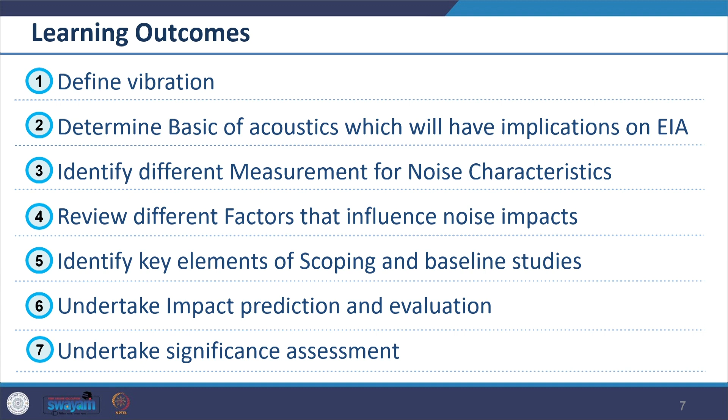So the basic course book we are following is Therivel and Wood's book on methods, so we are constantly referring to that. So when we consider noise, we see that almost all projects have noise impact. And noise during construction may be due to activities such as land clearance, construction, piling work, and the frequent transportation that takes place in and around the site. So all that leads to noise.

And we have seen much of the noise-related legislation. We have also seen certain environmental conditions related to that. So today we'll just focus on some of the limited definitions and then how we undertake scoping, baseline, and impact prediction and assessment. So noise is a major and growing form of pollution, and we had already seen WHO guidelines on that.

Looking at the basic principle of vibration, so what is vibration? Vibration refers to the oscillation of an object about a reference point. The number of oscillations per second is given in the form of frequency of vibration. There is a difference in how vibration and sound are experienced or sensed by humans. Sound is detected by hearing, whereas vibration is felt as it is transmitted through the solid structure directly to the human body. So one we receive from the ear, and the other we feel with the entire body.

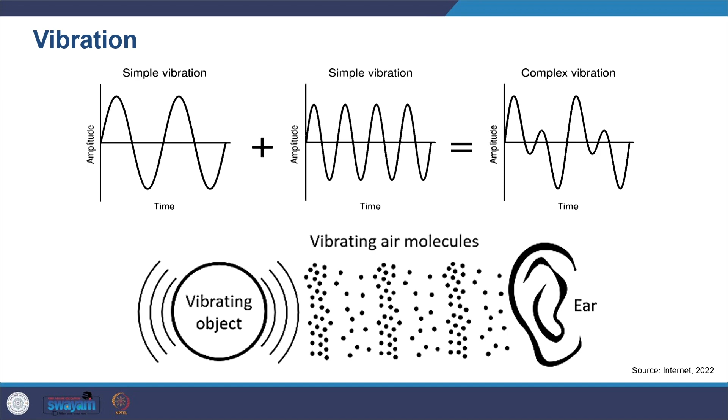So vibration can occasionally occur at a single frequency, but usually it is seen at several different frequencies. Vibration frequencies between 1 to 80 hertz are perceptible to humans. The particle may vibrate vertically, longitudinally, and horizontally as well. Often it is a combination of all these three: vertical, horizontal, and longitudinal.

Generally, what we see in EIA is that this vibration is quantified and given in terms of peak particle velocity, PPV, measured in millimeters per second, mm/s. So that is how you refer to it in an EIA report. And if you look at the threshold of human perception of vibration, the range is from 0.14 mm/s to 0.3 mm/s peak particle velocity, PPV.

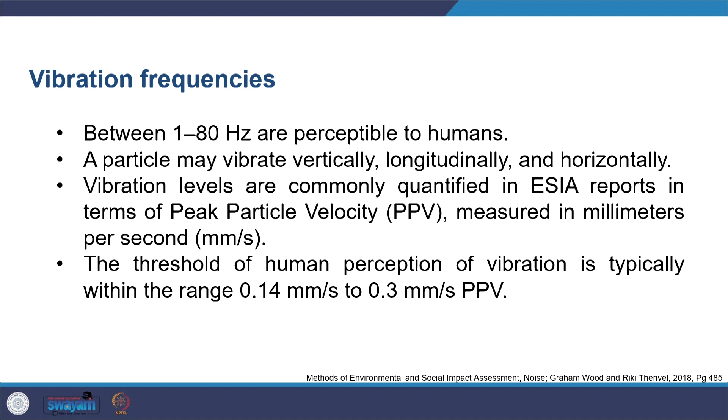So usually road traffic and railways are the common sources of vibration. If you have ever lived next to roads, you might realize how you feel the vibration when heavy vehicles move, or living near a railway track. So you would have a sense of what vibration is like. Usually you do not get complaints from many vibration projects; where complaints are raised, they are mostly concerned with vibration transferred through air.

You also find standards like BS 5228 standard, which indicates various construction activities and which activities cause vibration, and these can be referred to there.

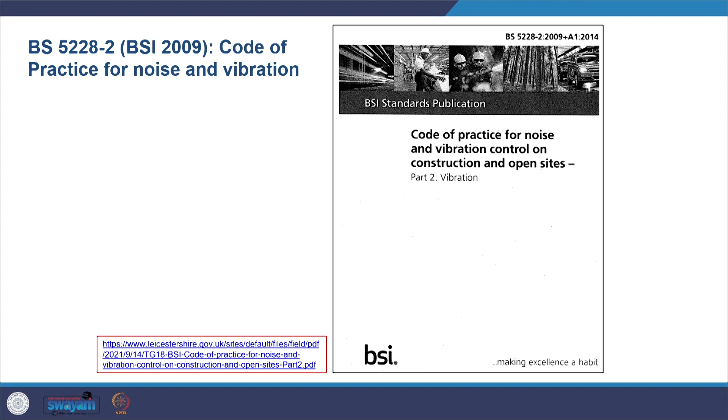So looking at what is noise, what's the fundamental concept behind noise? Noise is something where there is a sound which is unwanted. So unwanted sound is said to be noise. The key point here is that what is unwanted can be very subjective. So the key understanding when we define noise is that it's very subjective to how people respond to it, and irrespective of the objective reality, like the actual intensity of the sound, how people respond to that particular sound is what makes noise.

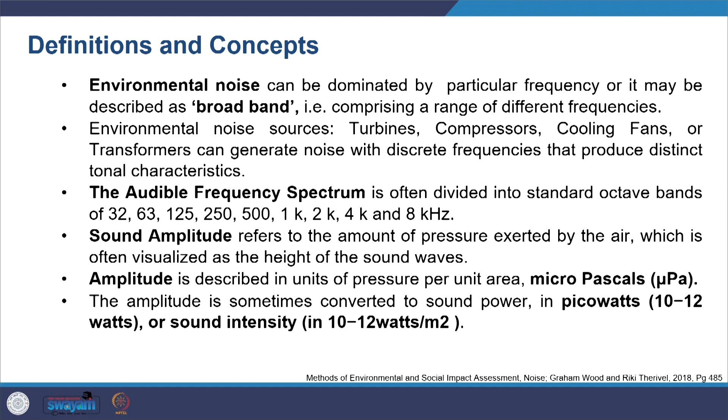So the amplitude is sometimes converted to sound power. Another term which you'll come across in standards is sound power, in picowatts, 10 to the power minus 12 watts, or sound intensity, which is 10 to the power minus 12 watts per meter square. Sound intensity is subjectively felt - it depends on the receiver. It is said as the loudness of the sound, how loud it is, and it is indicated in the form of a logarithmic scale of decibels. That is how sound intensity is represented, and you also have sound pressure level, which is LP.

In decibels, it's given by LP equals to 10 log of P, capital P, by lower p squared, decibels. Here, P is the amplitude of the pressure, referring to the amplitude of the pressure fluctuation, and small p is the reference value.

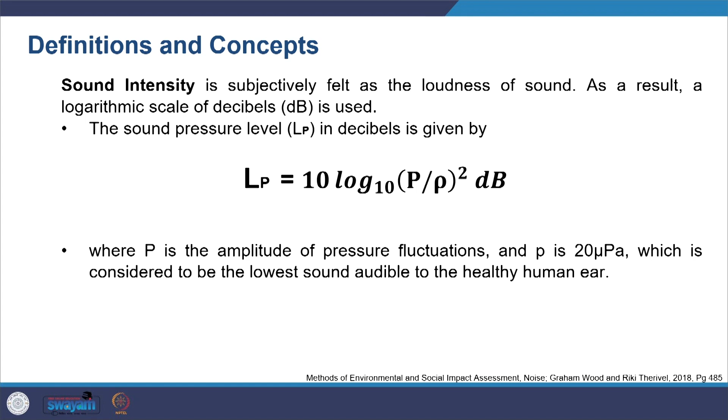The reference is 20 micropascals, and we take this number because it is considered the lowest sound audible to the healthy human ear. Sound intensity level can also be described as sound power, indicated by W, as 10 to the minus 12 watts.

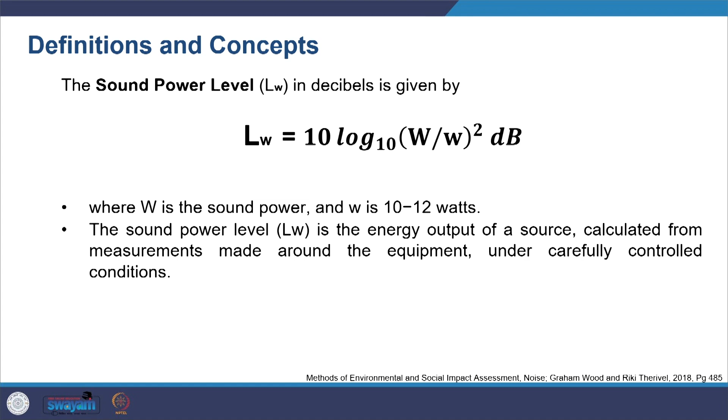Sound power level, LW, is the energy output of a source, indicating how much energy is coming out from the source. It's calculated from measurements made carefully around the equipment, wherever the source is placed, under controlled conditions.

So how do you get these values? The manufacturers of the equipment usually provide these LW sound power levels, so that information is provided to you, and you can use it to assess noise impact and undertake noise impact calculations.

There are certain frequencies for which human ears are much more sensitive, like 1 kilohertz, 2 kilohertz, and 4 kilohertz octave, and much less sensitive at the lower audible frequency.

If you look at most sound analysis done in EIA, the major focus is on the loudness experienced by the receivers, more than the actual physical magnitude of the sound. So how the receiver responds is key to the EIA process.

There's also a weighting curve used to give a single figure index. This index is developed taking into consideration the sensitivity of the human ear and its range of sensitivity.

Looking at how noise is really measured, the characteristic where you characterize noise over time.

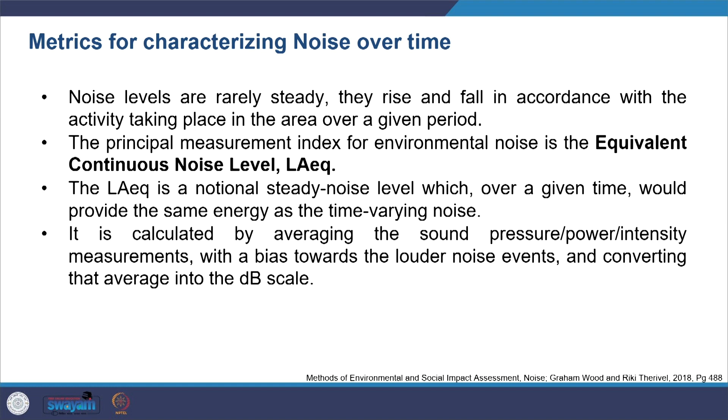The key measurement index used for environmental noise is the equivalent continuous noise level, LAEQ. This is a notional steady noise level, a consistent noise level which over a given time would provide the same energy as the varying noise.

It is calculated by averaging the sound pressure, power, or intensity measurements, with certain assumptions giving more bias towards louder noise events, and converting that average into the decibel scale.

Most environmental noise meters give an index you can read directly, and LAEQ is most commonly provided. Its benefit is that it takes into account the energy and duration of noise events, and it is a reasonable indicator of how people respond to noise, acceptable for a wide range of sources.

Now, looking at the factors influencing noise impact. There are physical factors which influence how much effect a sound will have upon a potential affected receptor.

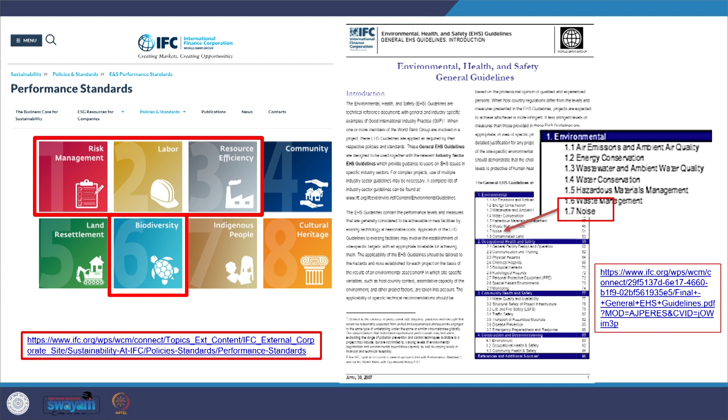Further, wind speed and direction can also affect the noise level. There are guidelines - IFC performance standards provide international benchmarks for environmental and social risk management, and you can look at PS 1, 2, 3, and 6 for these guidelines. We have already seen some of these guidelines in our legislative session, as well as the CPCB guidelines which are provided. So that was the first key conceptual understanding.

Now moving to the second part, we look at scoping and baseline studies - how do we undertake that? When dealing with noise, what do we do at the scoping stage? Usually we identify the potential sources of noise, from where you need to identify all the noise sources that will come in your study area. And you need to identify who all are going to receive that sound, who will be the receptors - the people who are likely to be affected because of the kind of development you are going to undertake there.

Further, apart from receptors and sources of noise, you also look at the areas from where you're going to monitor the data - where you will place the equipment and regularly monitor the noise level in your study area. You are also required to check the national and international guidelines which are available for your study area and your subject domain.

So you need to refer to that as well in the scoping stage. So here in the image you can see this case study we'll be referring to here for the line source. We're looking at the corridor transportation project here. I'll be sharing the link for this. We'll be sharing this file with you.

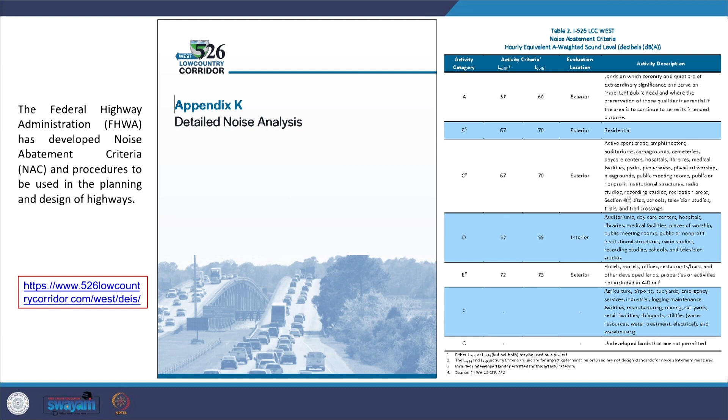been happening there. So at the baseline study level, we identify what information is already there. So you need not collect all the information. What information is already there, you can take it as a secondary data source. And then what data you need to collect, collection of any on-site data. So you need to judiciously decide upon the locations from where you are going to collect the data. And one also needs to take care what kind of changes will happen in the baseline condition in future because of your project. So that also needs to be taken into consideration.

And you need to identify potential sources of noise, and you need to undertake a very detailed project analysis. This project analysis has to be undertaken on site, your project area, as well as off site, wherever the receptors would be. And then you have to take it at every stage of the project, like during the construction stage, operational stage, and decommissioning stage. So you need to determine the characteristics of the noise source.

So what is the characteristic of it? When we say the characteristic, whether it's continuous or it's coming intermittently. So what kind of noise source is that, at what time it comes, what's the duration of it, and what's the tonal characteristic of that noise, and all those parameters have to be seen.

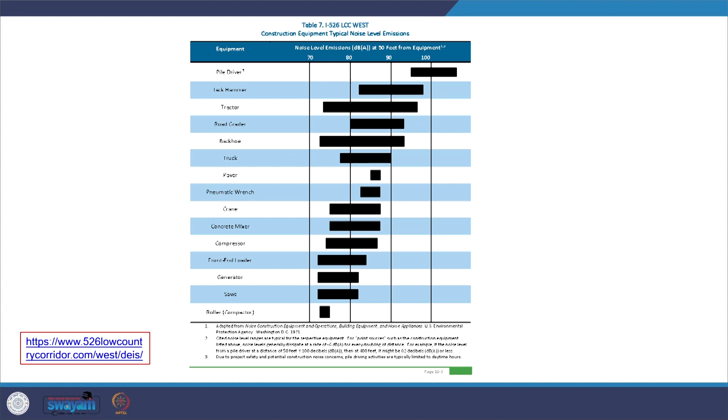And you see that during the scoping stage, each source of impact you need to consider, and you need to take a judgment on what needs to be done. So you need to determine what kind of detailed assessment would be required, and where you can work out without detailed assessments, and you also need to decide what will be the significant impact beforehand, so that you don't invest in studying unnecessary details which will not have significant impact.

And whatever you're deciding, what areas to be covered, what not to be covered, you need to explain your decision. You need to justify why you're covering some areas and not covering the others. So here from the same case of the Lowcountry Corridor, you can see the project area in the center. And you can see on the right hand side all the 49 noise study areas which are identified. So you see how intensively those areas have been identified, and you can see all those marked in the red box, which shows the noise study areas they have picked up here.

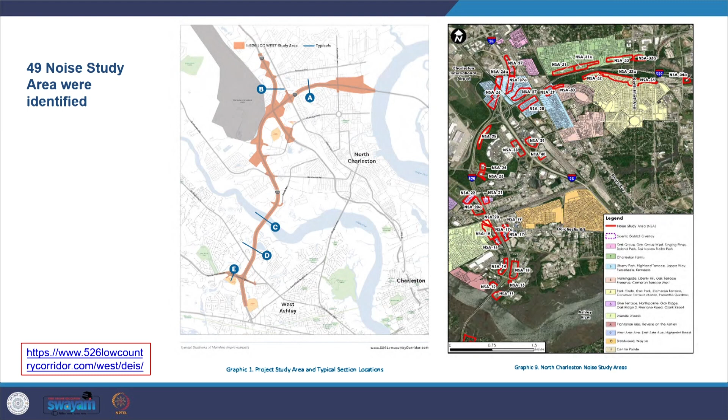And in the report, this I've taken from an EIA report, they have also mentioned the noise scale. So here you can see common indoor and outdoor noise levels. You can see on the left hand side all common outdoor sound levels, and then common indoor sound levels, starting from the threshold of hearing at the bottom.

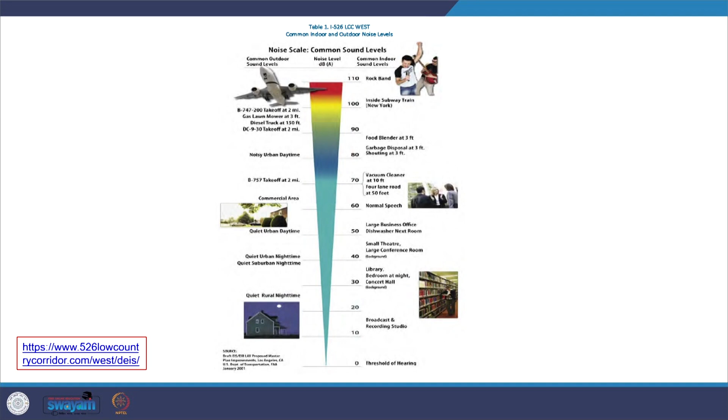And then you also have the noise exposure hierarchy. So you also see what noise is noticeable or not noticeable, which will not have impact. So all those kinds of judgments you would be making in your scoping stage itself. There might be some sounds which are noticeable but not intrusive; there's no complaint about it, so there's no specific measures required. Then you might have noticeable and intrusive, which can be mitigated, and then you will have noticeable and disruptive, which you need to avoid, and then noticeable and very disruptive, which you need to prevent. So such kinds of judgments you have to make.

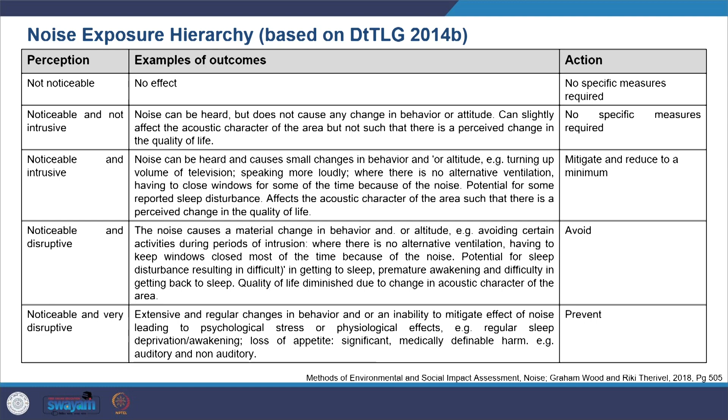And the key important point in all these assessments is to understand the receptors. For that you can also prepare a map to identify noise receptors in the areas. And receptors can vary, so you can have different kinds of receptors. You can have local residents, people working in the area or visiting the surrounding areas. And you also need to identify particular land uses or activities happening there which are noise sensitive. For example, recording studios, schools, hospitals, libraries, worship spaces, churches, or things like that. Those will be very sensitive to the noise, so you need to take care of that.

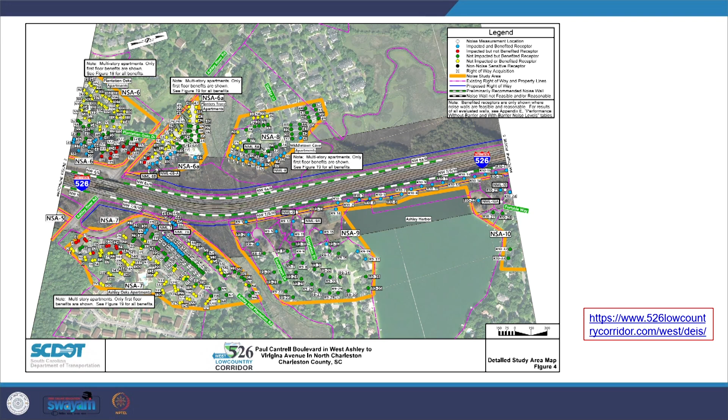At this stage, you also need to discuss with the local authority how your assessment has to be, in terms of how much area you will cover, at what time, what period, what day of the week you would make the recording. All that has to be aligned with the requirement of the local authority. And you also need to plan the monitoring sites, where you will make the recordings. Usually it's the most sensitive receptor, like the school or the hospital. So you locate your monitoring places at those sensitive sites. That's the basic idea behind that.

And you may face problems identifying sensitive receptors in the case of linear development. So here, in the case we are following, very systematically they are looking at all the pockets, different areas and receptors, and how the study has to be done. Here you can see again how they are looking at various areas, the other roads, railway crossings and stations in the project area.

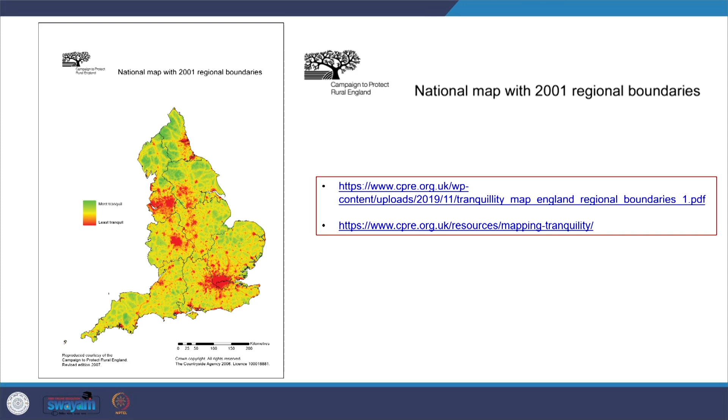There is a lot of secondary data available. Usually noise maps are prepared. In particular in Europe, you would find the directive on assessment and management of environmental noise, and CPRE prepares tranquility maps. One can readily take those; they are very small scale maps covering large areas, giving a general idea about the level of noise. However, for a detailed study you might have to undertake your own. I have given you the link where you can explore and download those maps if you need. And IEMA may also provide summaries of research studies, which show what kind of variations happen and what kind of noise monitoring data are there.

So there can be a lot of variations when you measure the sound, and those variations can be because of the range of equipment you are using. If you look at the equipment used for measuring sound, you have a microphone, which converts changes in ambient pressure into an electrical quantity, usually protected by a windshield. Then you have a sound level meter, which gives you information in dB. Then you have an analyzer, which records noise descriptors like LAeq, LAmax and so on over a period of time. Then you also have a reference sound source, which you use for calibrating the equipment. All these can also be incorporated in one machine.

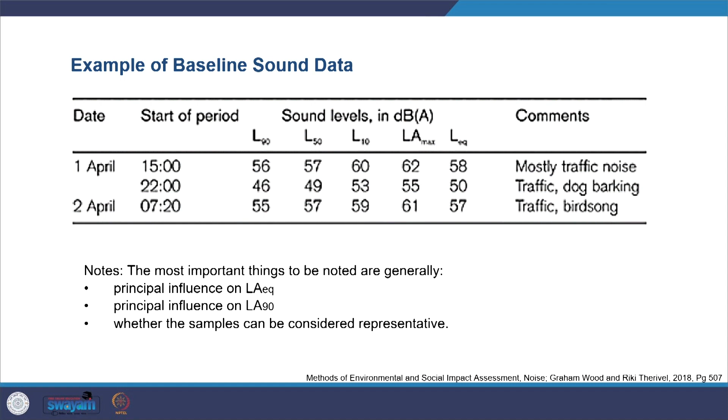So here you can see in this example how the baseline noise data has been recorded for the EIA report. In this table, you have the start periods, like April, you can see the start period at 3 o'clock, at 10 o'clock they are ending it, and then at 7:20 they are recording it again, and then the sound level which they have recorded and what the comments are. So this is one example. So this is about the baseline, what things you take care of.

Now moving on to impact prediction and evaluation. The main purpose of impact prediction and evaluation is to find out what kind of changes will happen in the noise level because of the project which is coming up, and these changes you have to look at in both the short term and long term. Once you understand the changes, you need to understand the significance of those changes, how important they are. And you need to understand that predicting noise is a very complex process, and it changes with a lot of conditions.

For example, conditions like the existing and future baseline noise levels. If those change, then things might change. What kind of equipment you're using, the duration of every stage of construction and operation of your project, which day and time what kind of equipment will be used, what kind of activity will go on at the site, and then the location of the receiver, how close or far they are, and how sensitive they are.

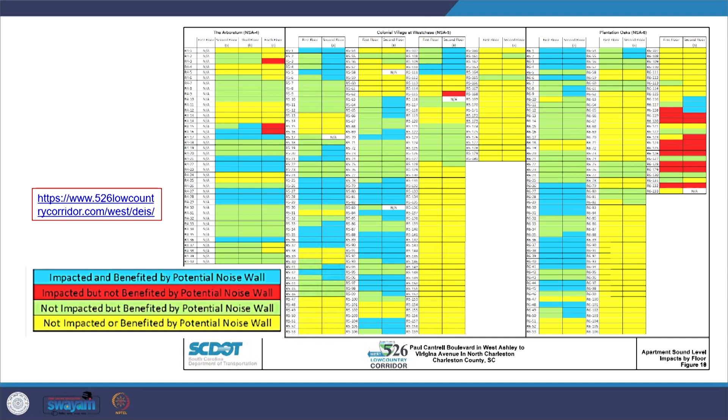So when you deal with sound pressure level data, you measure the existing emission source, what kind of source is there, and you take from the standards what is given there, and then you calculate the distance it is going to travel, and which geometrical dispersion it will take. So in case of a point noise source, when you have an industry or any construction site, you take it as a point source.

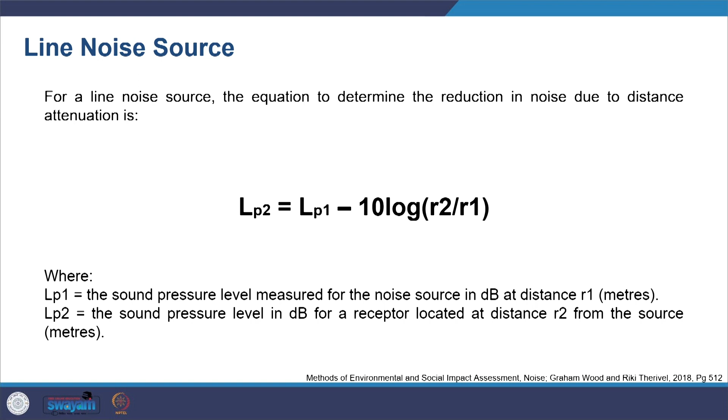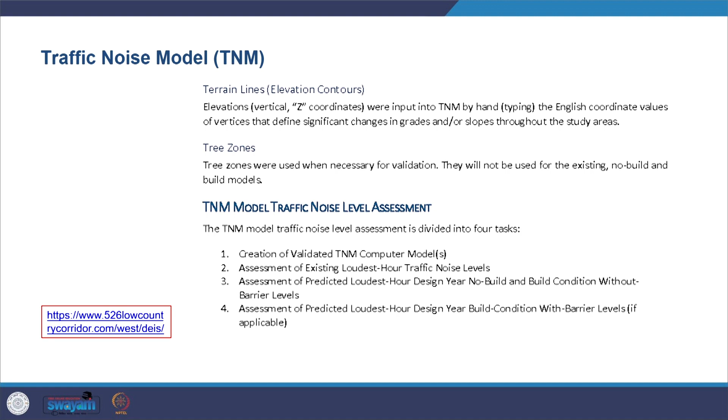Here, from the case we are following, we see they have used a traffic noise model. They have taken roadways, receptors, barriers, terrain lines, ground zones, tree zones; they have identified all those things. Then there are certain steps they followed: they would validate the computer model, look at the loudest hours' traffic noise level, analyze it under no build and build conditions, without barriers and with mitigation, and assess the difference in the impact.

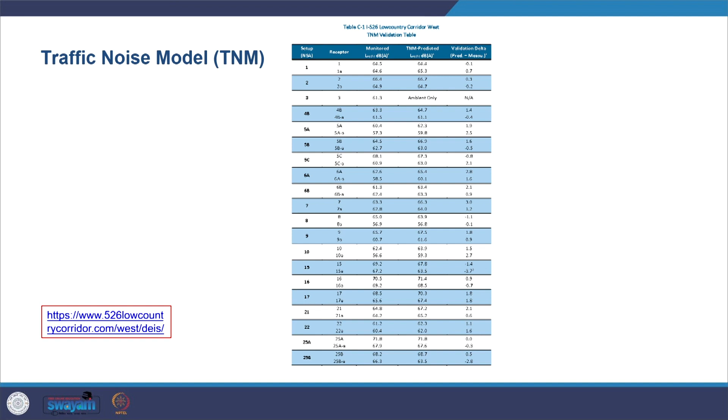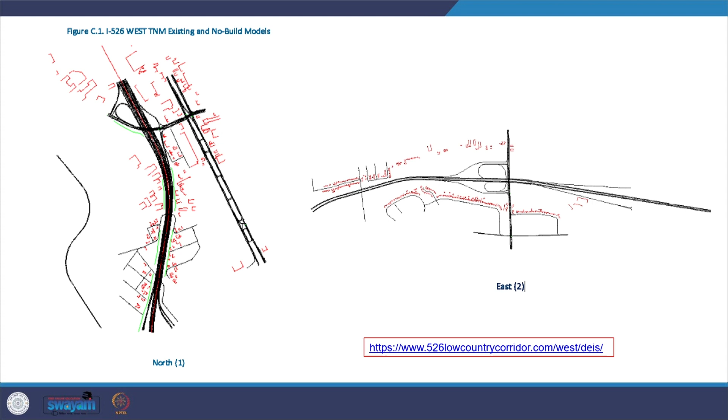Here you can see their model results, where they have the receptor monitored level, the model predicted value, and then they have also validated that value. In this way you can see how they have built the existing scenario of the noise with the no build model, with no intervention. And now with the build model you can see what the noise level would be with the new project and the mitigation coming up.

Now we'll look at how we assess the significance. Significance is very subjective because we're dealing with noise, and it needs a lot of professional judgment. Significance criteria also differ a lot, but it's very important for EIA that you have a consistent and transparent system. For significance of noise, you consider the sensitivity of the receptor and the magnitude of the change which is going to happen, generally indicated in the form of an impact significance matrix.

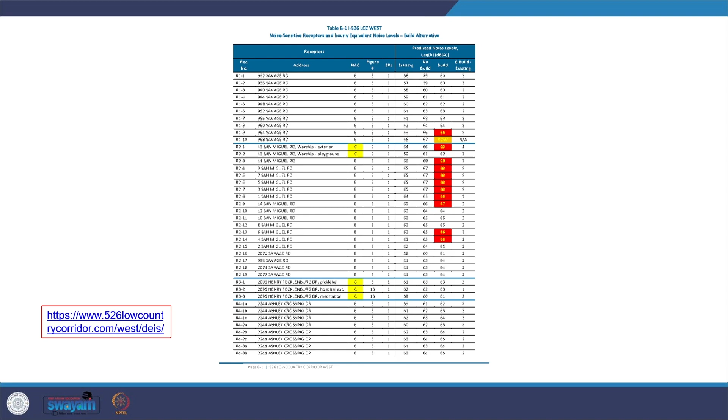It would also depend on the nature of the sound. Is that sound continuous or does it have breaks? What is its frequency, and at what time and day is it occurring? One also needs to average out the period, but one needs to be very careful, because averaging out can also hide high magnitude noise.

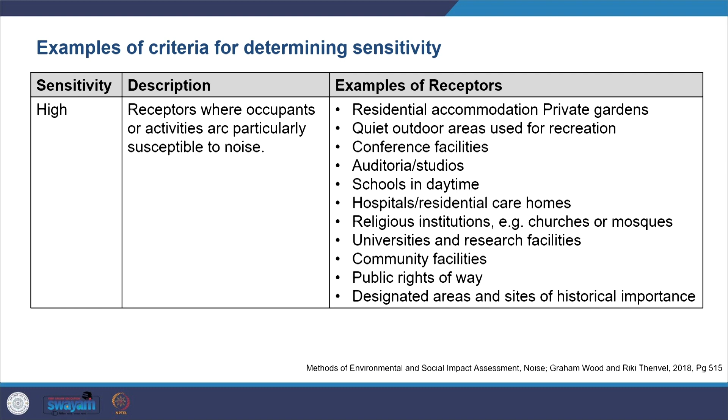Here you can see another example of determining sensitivity: high, medium, low, and negligible sensitivity of the receptors. For example, receptors where occupants or activities are particularly susceptible to noise, such as residential accommodation, private gardens, and so on. To understand the sensitivity of the receptors, you can look at this table. So that was about noise.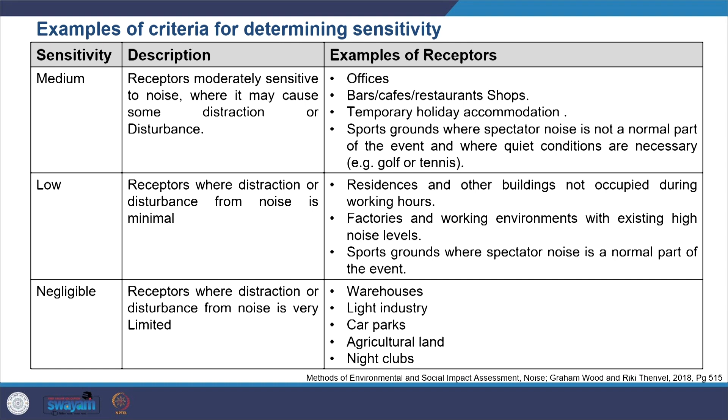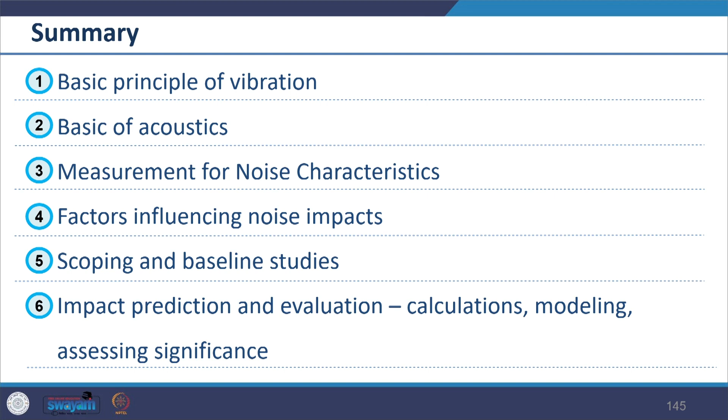Summarizing what we covered today: we looked at the basic principles of vibration, the basic concepts of acoustics, and the measurement of different noise characteristics. Then we looked at the factors which influence noise impacts, what one has to undertake during scoping and baseline assessment, and various impact prediction and evaluation aspects: what calculations and modeling have to be done, and how you assess the significance of any impact you find.